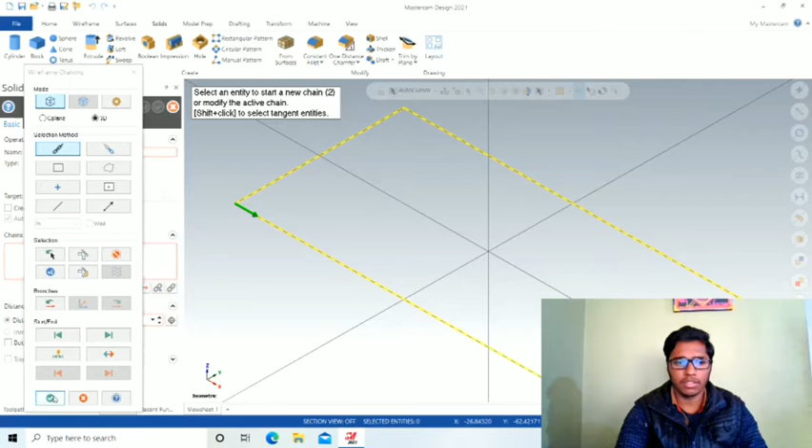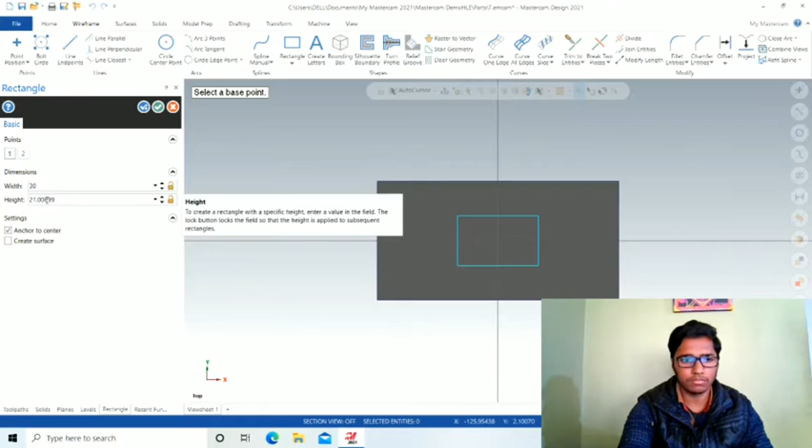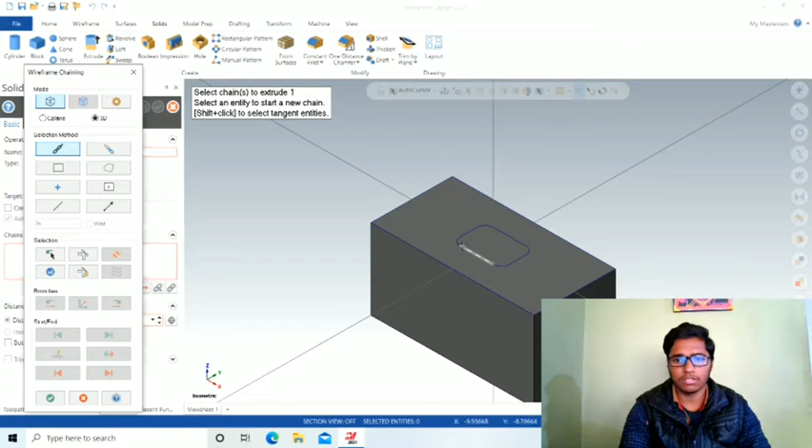Now again go to the wireframe, then go to the rectangle. Now go to the view, then go to the isometric view. Now again go to the solids, then extrude, then select the chain, then click on OK. Distance is 15 mm.

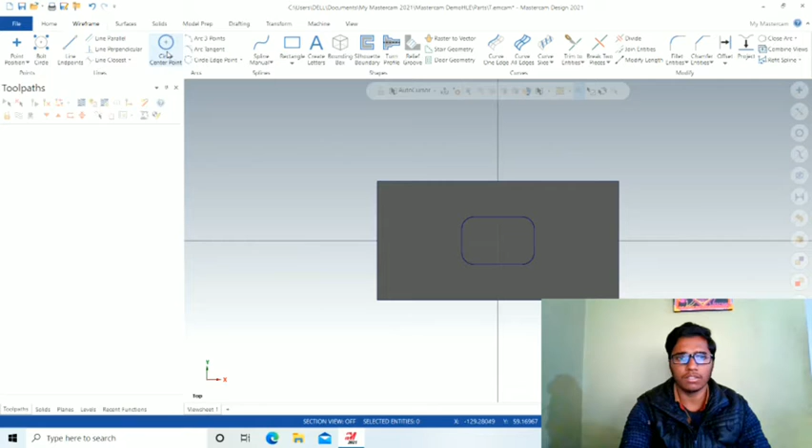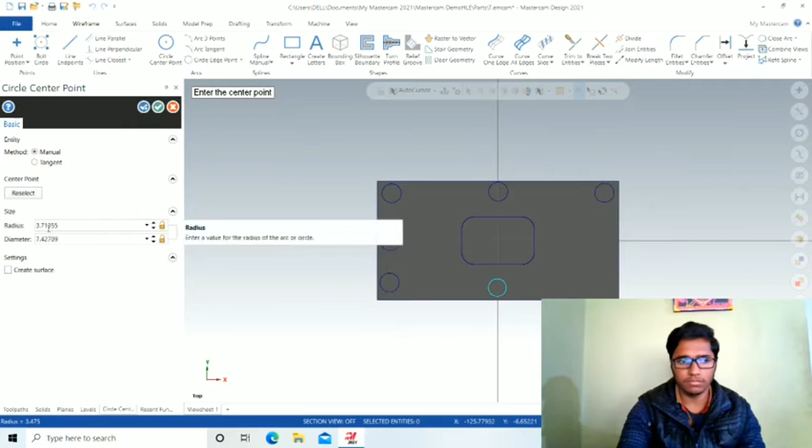Now again go to the wireframe, then draw the circle. Go to the isometric view. Now go to the solids, then extrude. Then select this circle.

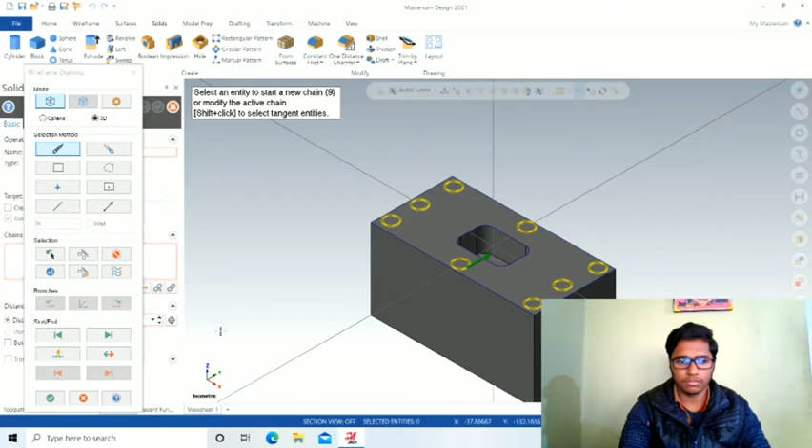So our final diagram is ready. Now the machining part. Go to the machine, then go to the milling machine. Then go to the properties, stock setup.

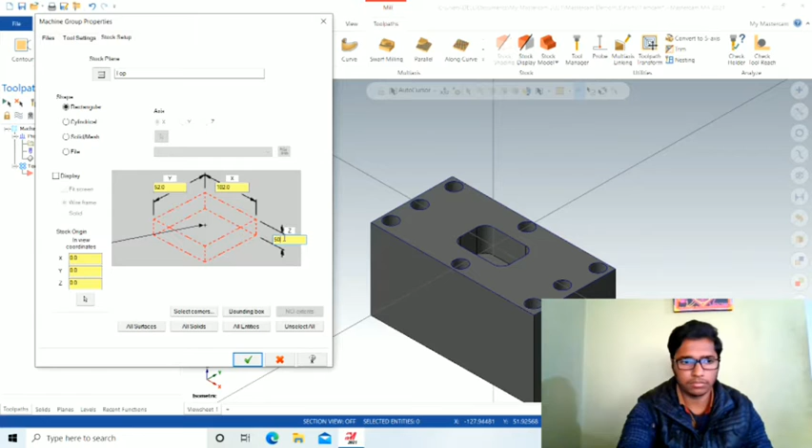So in the dimensions of rectangle, we have to give some 1 mm or 2 mm extra dimension. Now click on OK. Now the first process is facing.

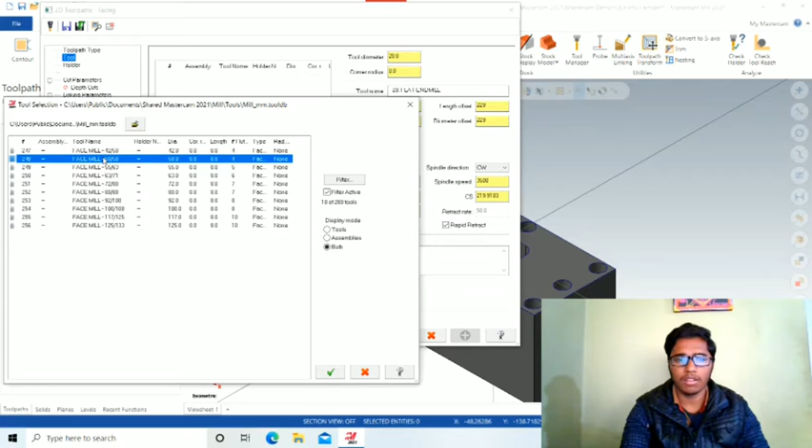So go to the face, then select the chain. Now go to the tool. Now go to the select library tool. Then go with face mill 50 diameter tool.

Now go to the cut parameter. Then change the style and keep the style as zigzag. Now go to the depth cut. Then click here. Now go to the linking parameter.

Change everything in absolute, and give depth as minus 2 mm. Then click on OK. Now we can see the facing process.

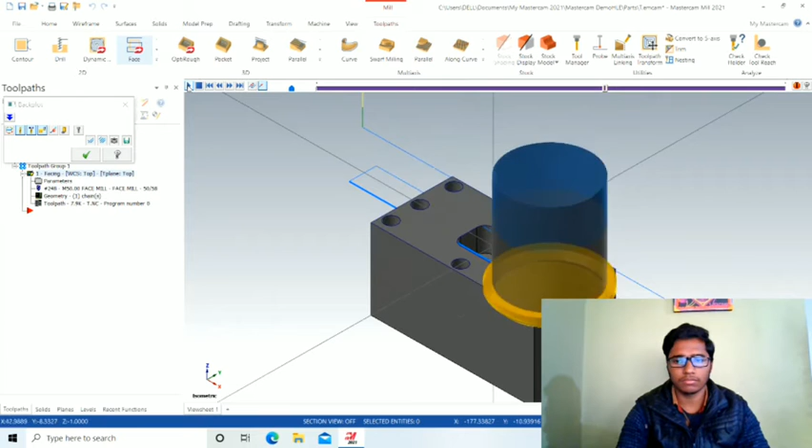So now facing is done. So next process is contour. Go to the contour, then select the chain. Now go to the tool.

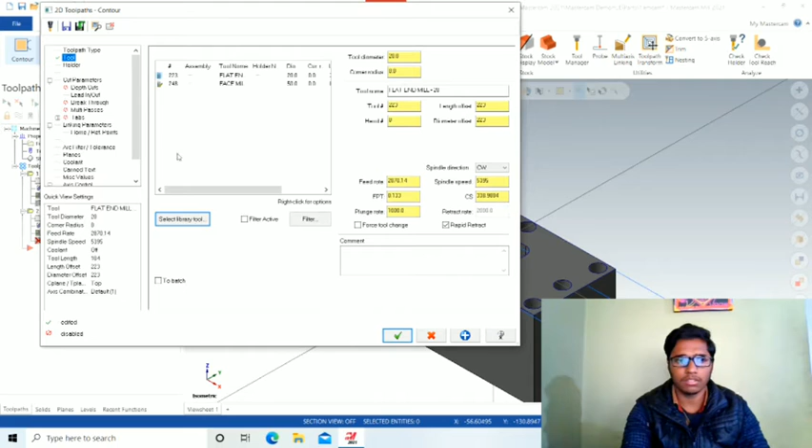Now go to the select library tool. Then go with flat end mill diameter 20 mm. Then click on OK. Then go to the cut parameter. Compensation direction should be right.

Now go to the depth cut, and the maximum rough step is 5. Now go to the linking parameter, then change everything in absolute, and depth is -15. So contour part is done, we can see here.

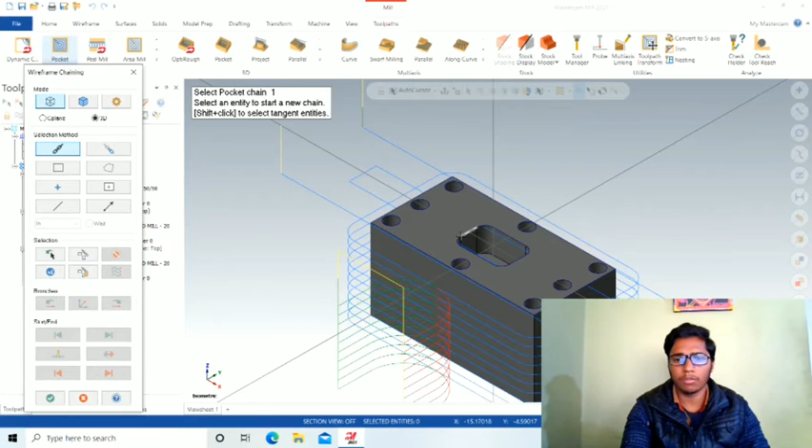So now next process is pocketing. Go to the pocket and then select the chain of smaller rectangle. Now go to the tool, then again select library tool. Now go with flat end mill, diameter 10 mm.

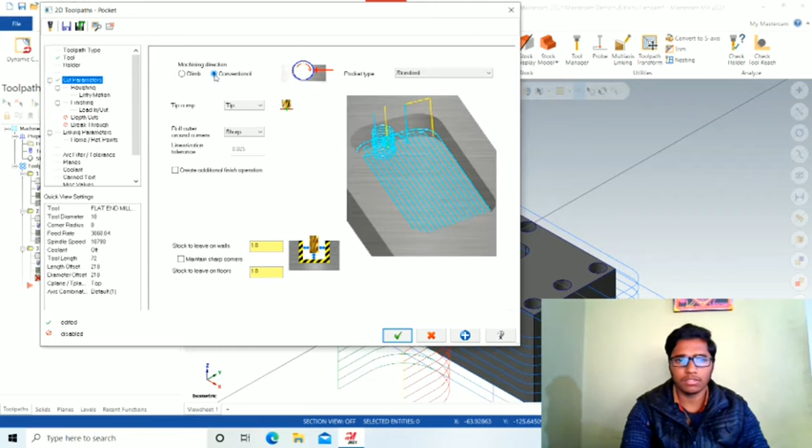Now go to the cut parameter, machining direction would be conventional. Now go to the roughing, then select high speed roughing. Now go to the depth cuts, then go to the linking parameter, change everything in absolute.

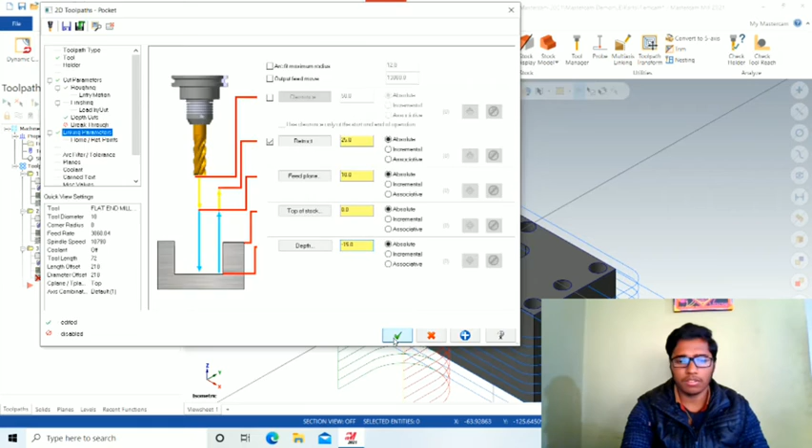And depth is -15 mm. So pocketing part is done, we can see here.

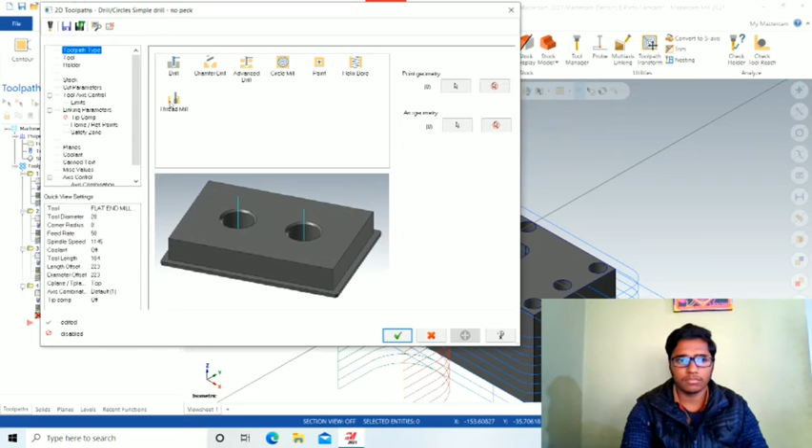So now next process is spot drilling. Go to the drill, then select each circle. Now go to the tool, select library tool, go with NC spot drill 6 mm diameter.

Now go to the linking parameters, change everything in absolute. Now we have to calculate the depth, so click here. So depth is -3 mm. Click on OK. So spot drill is done, we can see here.

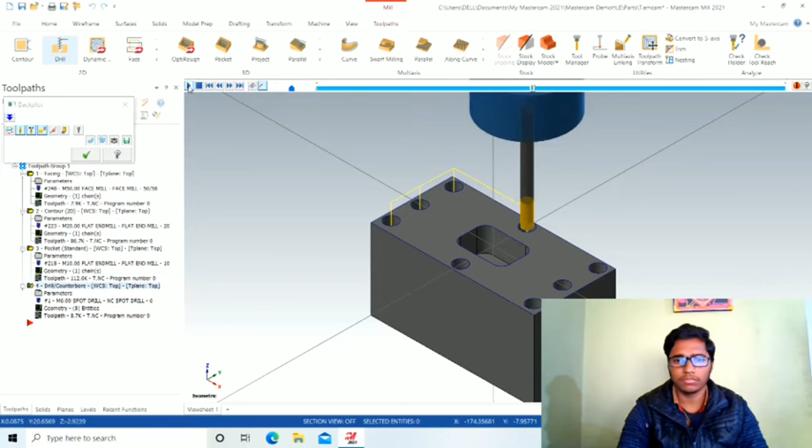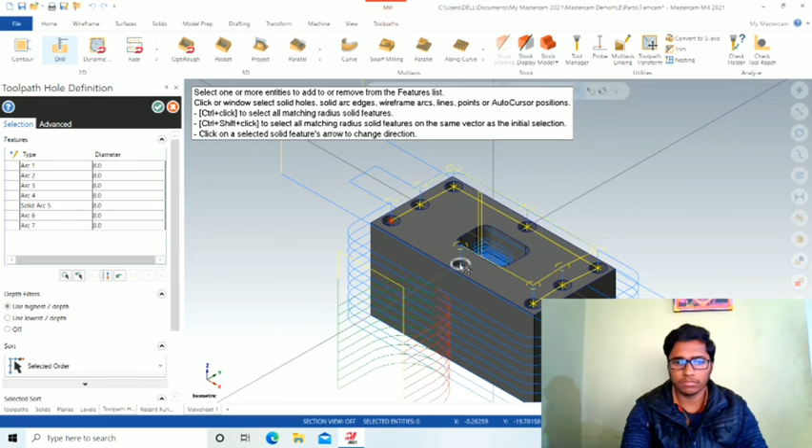Now the next process is final drilling. Go to the drill, then again select each circle. Now go to the tool, then select library tool. Now we have to select the tool.

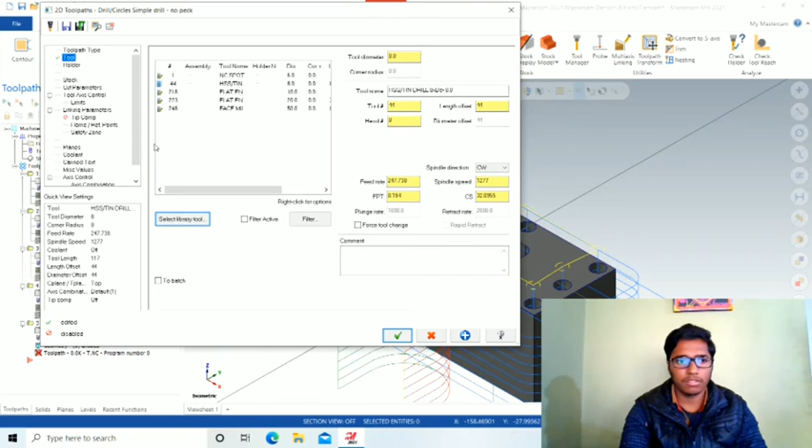So go with HSS/TiN drill, diameter 8 mm, because the diameter of circle is 8 mm, so we have to select the 8 mm tool. Now go to the cut parameters. The cycle is peck drill.

Now go to the linking parameters. Then depth is -15. Now go to the tip comp. So final drilling is done, we can see here.

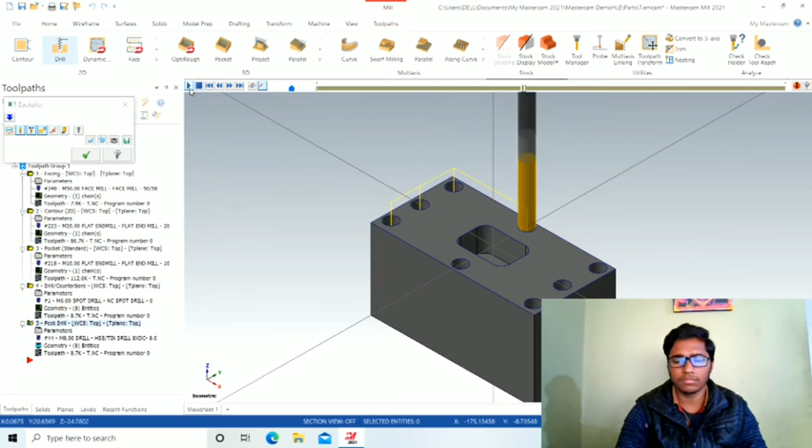So now final simulation is remaining. Select all operation, then verify it.